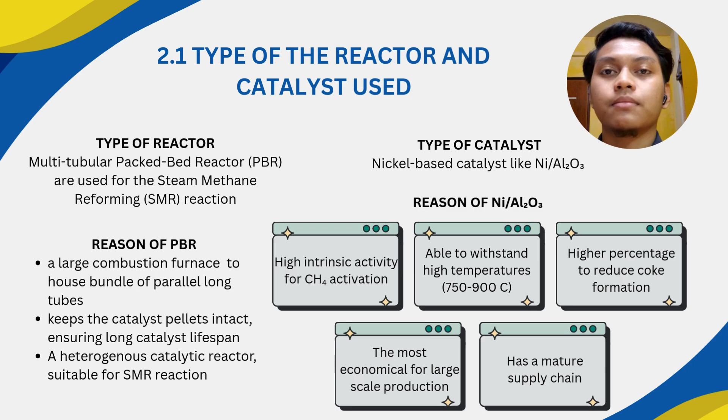Third, it has a high percentage to reduce coke formation. Fourth, it is the most economical for large-scale production compared to other noble metal catalysts. And lastly, it has a mature supply chain which can reduce future risks.

We use 4 key strategies to maximize hydrogen production. First, high temperature. The reaction needs heat. By running at 850 degrees Celsius, we push the reaction to make more hydrogen and also reduce carbon buildup. Second, moderate pressure. The reaction creates more gas molecules. A moderate pressure of 20 bar helps this gas expansion happen, boosting conversion without extra process costs.

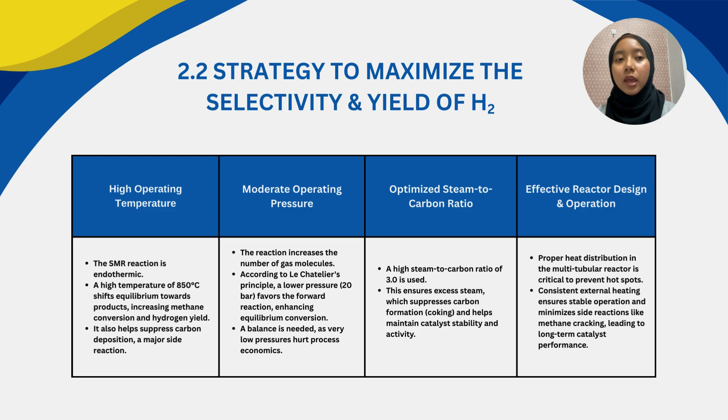Third, extra steam. We use a lot of steam, which has the steam to carbon ratio of 3.0. This extra steam stops carbon from forming and clogging the catalyst, keeping it active for longer. And fourth, good reactor design. Our multi-tube reactor spreads heat evenly. This prevents hot spots and keeps the reaction stable, which protects the catalyst and ensures high hydrogen output. In short, these 4 choices work together to give us maximum hydrogen efficiently and reliably.

Our goal is to design a reactor that produces 30,000 metric tons of hydrogen every year. The main reaction is steam methane reforming. Methane and water vapor react to produce carbon monoxide and hydrogen. This reaction is endothermic, meaning it requires a constant supply of heat. Our solution is a packed bed reactor, specifically a multi-tubular type.

Inside the tubes, we use a nickel alumina catalyst. This catalyst is highly active, stable at high temperature, and cost-effective. In simple terms, we mix steam and methane, then pass them through heated tubes filled with catalyst. The output is a mixture of hydrogen, carbon monoxide, and some leftover steam and methane. This design efficiently converts natural gas into the hydrogen we need.

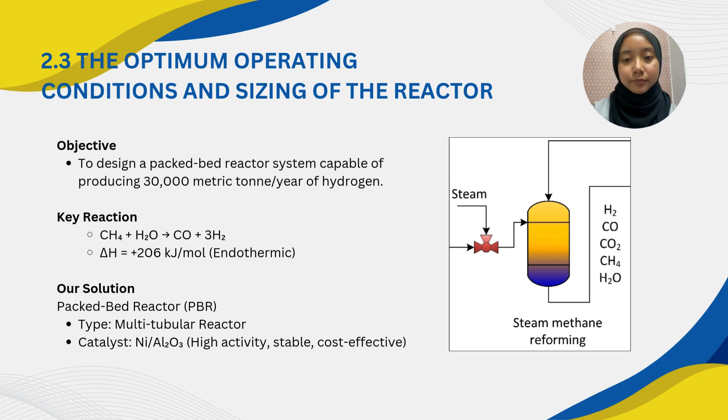Let's look at our operating conditions and results. For temperature, we run at 850 degrees Celsius. This high heat drives the reaction forward to produce more hydrogen. For pressure, we use 30 bar. This balances a fast reaction rate with good conversion efficiency. The steam ratio is 3.0. This means we use 3 times more steam than methane, which prevents carbon from forming on our catalyst.

Now, for the flow rates, our inputs are 628 kilomoles per hour of methane and 1884 of steam. The output we're successfully producing is 1695 kilomole per hour of hydrogen along with 565 kilomole of carbon monoxide. These numbers confirm we're hitting our production target.

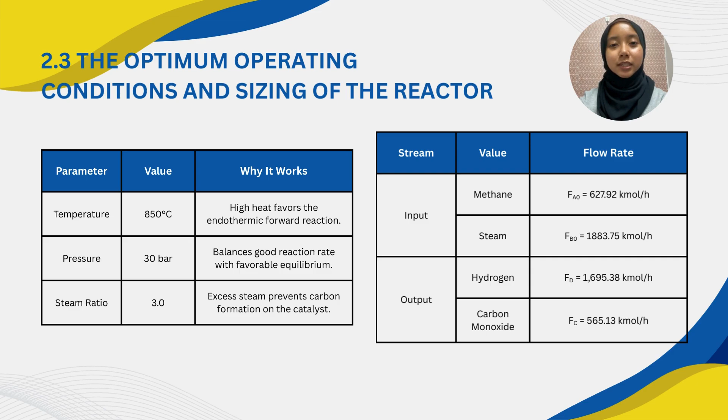Now, let's move on to the sizing of the reactor. To calculate the volume of reactor, we follow these 4 steps. The first step is to calculate the fractional volume change and the concentration of all the components. The second step is we assume that the reaction for component A is first order and we calculate the value of k. Next, we move on to the third step, which is we use the formula FA0 equal to CA0 times v0, and we use it to calculate the value of v0.

And lastly, for the fourth step, we use the formula of the volume of PFR, and we assume that the volume of PFR and PBR is the same. Then we use all the data that we have calculated earlier to calculate the final volume, and we got the final volume of the reactor is 1.407 meter cube.

Then we move on to the yield and selectivity. Yield of a reaction is the ratio of moles of desired product formed to the total moles of reactant consumed. We apply this formula, and after we've done the calculation, we got the yield of component D is equal to 3.00.

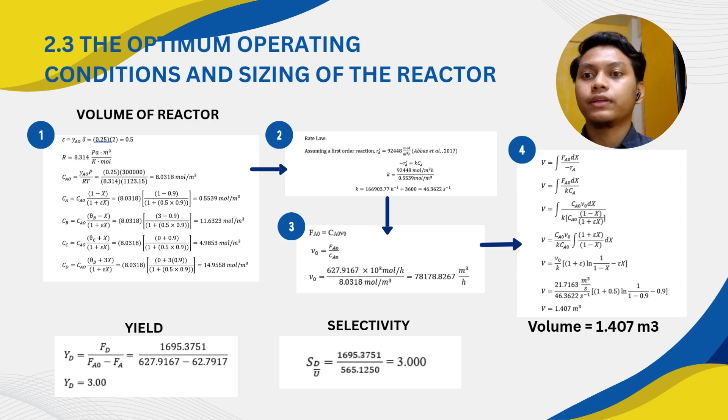Next is selectivity. Selectivity is the ratio of moles of the desired product formed to the moles of the undesired product formed, which means that higher selectivity in a reaction means that most of the reactant will react to form the desired product. Therefore, after we've done the calculation, we got the selectivity of our reaction is equal to 3.00.

Right. So the identification of species and concentrations of inherent impurities. We have four types of species, which are methane CH4, water vapor H2O, carbon monoxide, and carbon dioxide. So the gas stream entering the separator originates from the outlet of the previous packed bed reactor, where the steam methane reforming and subsequent water gas shift reaction occurs.

As a result, the stream consists of a mixture of reactants and products including unreacted methane, steam, carbon monoxide, and the desired hydrogen. These species represent both useful product and inherent impurities that must be separated to achieve the required hydrogen purity specification. The molar concentration of each species was determined from the reactor mass balance calculation and equilibrium conversion results performed in the preceding section.

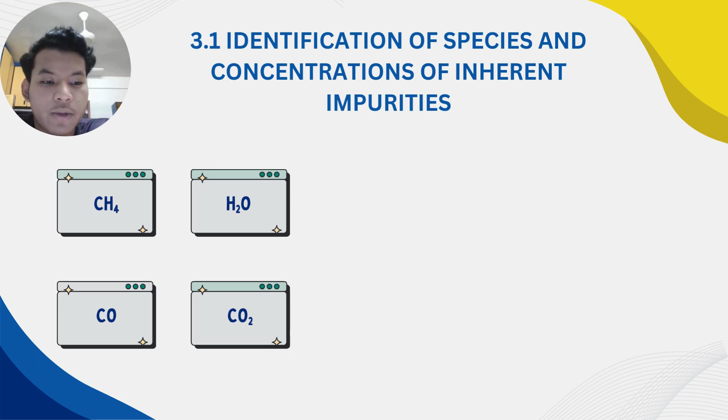Steam also exists in significant quantity and must be removed prior to final purification. This compositional analysis is essential for determining the most suitable separation strategy and ensuring the designed system complies with the required hydrogen purity of 99.9% for final product specification.

Hello everyone, my name is Alia, and today we will talk about the final and most important step in our plan, which is cleaning the hydrogen gas to make it 99.9% pure. So we use a system called pressure swing adsorption, or PSA, which is the most common and trusted method used in industry to make very pure hydrogen.

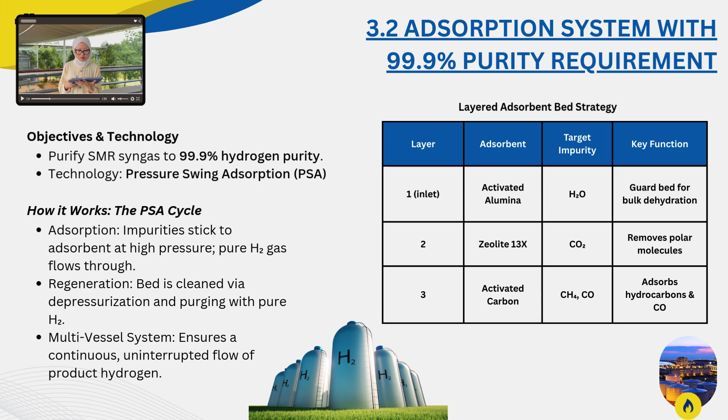So here is how it works. We push the dirty gas mixture into a tank filled with a special material, and these impurities get stuck on the material, but the clean hydrogen gas passes right through. So the system has several tanks that work in a cycle. While one tank is cleaning the gas, another is being cleaned itself to get ready for the next batch. This gives a non-stop flow of pure hydrogen.

Next, I'll be explaining the selection of adsorbent and adsorption process conditions. Our main goal here is to maximize impurity removal while maintaining a stable hydrogen flow at 99.9% purity. First, let's look at the operating conditions. We maintain a temperature of around 40 degrees Celsius and a pressure of about 20 bar. Why these conditions? It is because higher pressure improves adsorption efficiency and moderate temperature helps capture impurities effectively without compromising hydrogen flow.

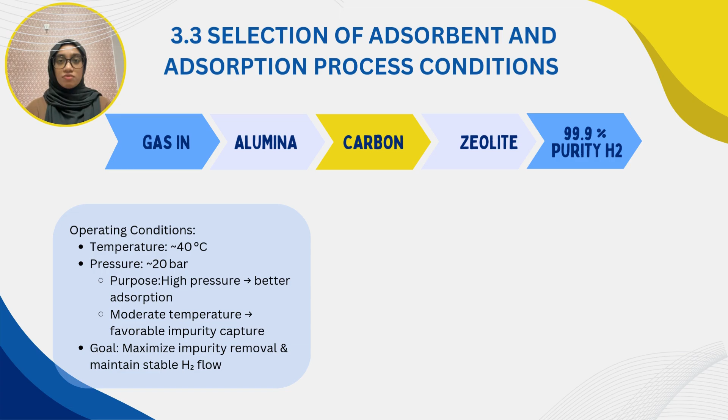Okay, so topic 3.4, which is the equilibrium isotherm of batch adsorption. There are three types of isotherm that we need to account for: the first is the linear isotherm, the second is the Freundlich isotherm, and the last is the Langmuir isotherm. But we ignore the linear isotherm as it is only valid for low pressure and dilute regions, which is not suitable for our process. And then to know which isotherm is more suitable for our process, we need to plot the data of Q and C and compare the linearity of both graphs.

Right. So to obtain the values of Q and C for the adsorption of CO2 on zeolite 13X, we obtained the data from a past research paper titled Mixed Gas Adsorption. Next, Q and C were plotted using the linearized Freundlich isotherm equation and the linearized Langmuir isotherm equation.

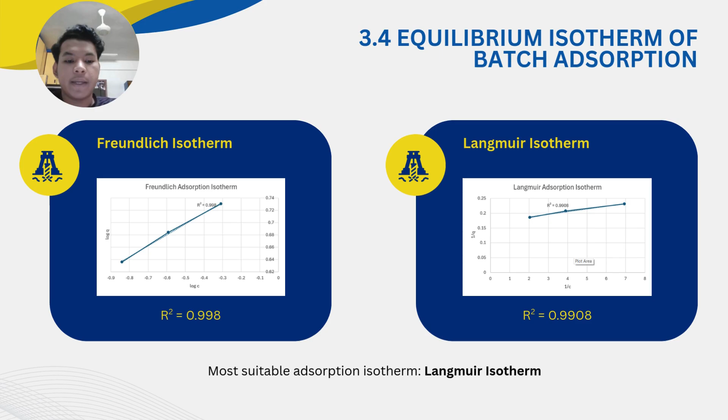The secret to the PSA system is the special filtering material inside the tanks. We use 3 different layers, each designed to catch specific dirty particles. The first layer is made of activated alumina, and its main job is to catch and remove water vapor. The second layer is zeolite 13X, and it is really good at grabbing carbon dioxide. The third and final layer, activated carbon, catches the last bit of impurities, which are methane and carbon monoxide. By using these 3 layers in the right order, we make sure every single impurity is removed efficiently, giving us the 99.9% pure hydrogen that we need.

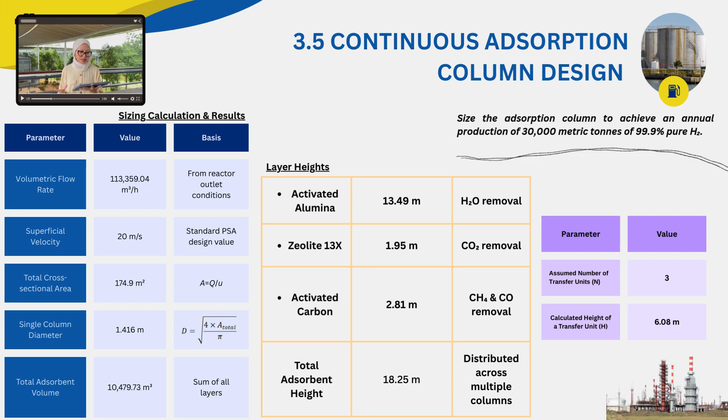Now, let's talk about how big these cleaning tanks need to be. First, we look at the amount of gas coming from the reactor; the total gas flow is over 3,600 kmol per hour. To design the tanks, we use some important rules: we need to produce 1,695 kmol per hour of clean hydrogen, and the cleaning works best at high pressure, 20 bar, and warm temperature, 40 Celsius. The speed of the gas flowing through the tank is set to 20 meters per second, which is a standard and efficient speed for this process.

Based on all of this information, here are the final sizes for our cleaning tanks. Each tank will have a diameter of 1.4 meters, which is a practical and manageable size. Inside, the 3 layers of filtering material will be stacked up. The alumina layer will be 13.5 meters tall, the zeolite layer 2 meters, and the carbon layer 2.8 meters. This makes the total height of the filter material 18.25 meters inside each tank. We also did a check to make sure this height is effective, and the math confirmed that it is designed to clean the hydrogen properly. So to wrap up, we have designed a cleaning system with tanks of practical size that will reliably produce a large amount of 99.9% pure hydrogen.

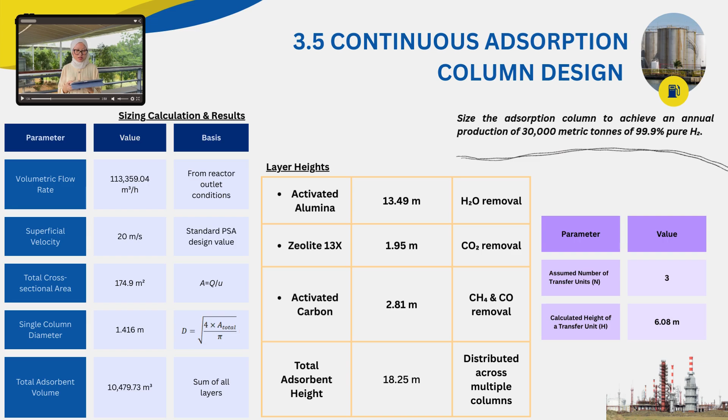So next, let's move on to the regeneration part. Regeneration is the process of restoring the adsorbent bed so it can be reused for adsorption. Common methods for bed regeneration include temperature swing, pressure swing, and inert gas purge. First, temperature swing works by heating the adsorbent to release the adsorbed molecules. This method is best for strongly adsorbed gases like carbon dioxide and VOCs. Next, pressure swing lowers the pressure in the system, which causes the adsorbed molecules to desorb. This method is energy efficient and allows fast cycles. It's commonly used for oxygen and nitrogen separation, as well as hydrogen purification.

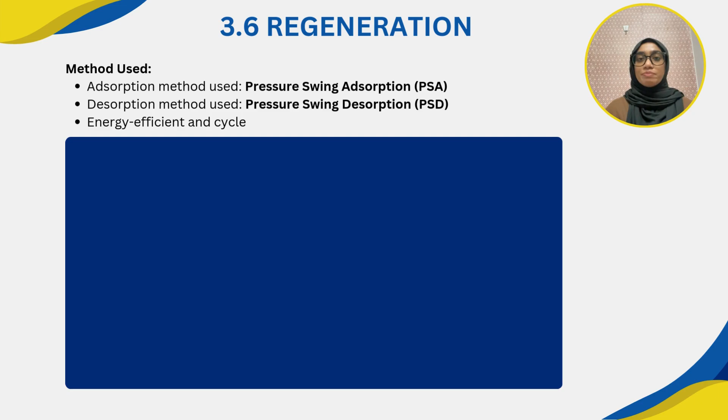Finally, inert gas purge uses an inert gas, such as nitrogen or argon, to displace the adsorbed species. This method is useful when adsorption is weak or when we want to avoid high temperatures. For our system, we use pressure swing adsorption for adsorption and pressure swing desorption for regeneration. We choose PSD because it's faster and uses less energy compared to other methods, making it ideal for efficient operation and shorter cycle times. In summary, PSD aligns perfectly with our adsorption method and ensures efficient regeneration for our system.

In conclusion, our project successfully designs a complete hydrogen plant that meets all objectives. For the reactor, we designed a multi-tubular packed bed system using a nickel catalyst. It operates at 850 degrees Celsius and 30 bar with a steam ratio of 3.0, achieving 90% methane conversion and producing over 1,600 kilomoles of hydrogen per hour. For purification, we designed a pressure swing adsorption system. It uses a layered bed of specialized materials to remove impurities, successfully purifying the hydrogen to 99.9% purity. The key to our success is the seamless integration of the reactor and separator. The output from the reactor feeds directly into the purification unit, creating an efficient and optimized process. This project proves we can design a viable, competitive, and industrial-scale solution for modern hydrogen production.